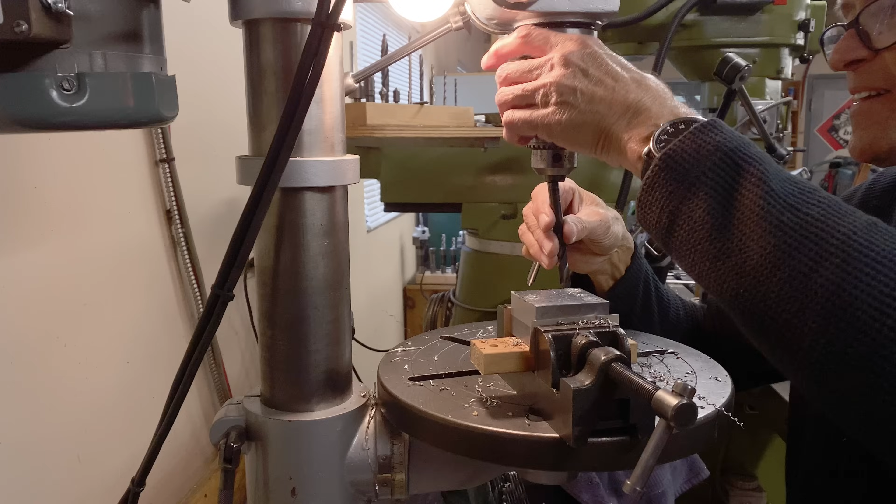But it's just one stem. How long can it take?

Hi, I'm Paul Brodie, back in the shop here. Feels like a good day, and we're gonna make a stem.

This is something that, well, I've made stems, but I've never made a mantis stem. That was Richard Cunningham, based down in LA. This was early 80s, I believe, and he didn't make a lot of these stems, so they're kind of hard to find, and I'm helping out here.

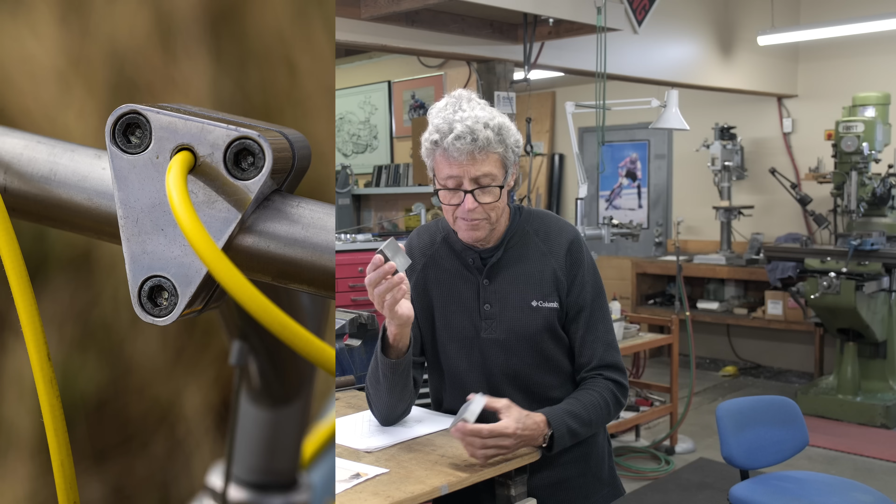What's unique about it is that it clamps the bar with a couple of plates. The rear one, which is welded onto the extension tube of the stem, is steel, and the front is aluminum because it saves weight. You can polish it up.

So that's going to be the first part. I worked on this last night, and I made up a drawing. It's kind of simple in a way, but at the same time it's a bit complex because you got to get the shape right.

I could see that Richard worked on this for quite a while to kind of maximize these two plates and the shape of them, because the extension tube has to go onto the back of the triangular plate. There's not a whole lot of room, and you don't want this to be big because it's steel - it's kind of heavy and clunky.

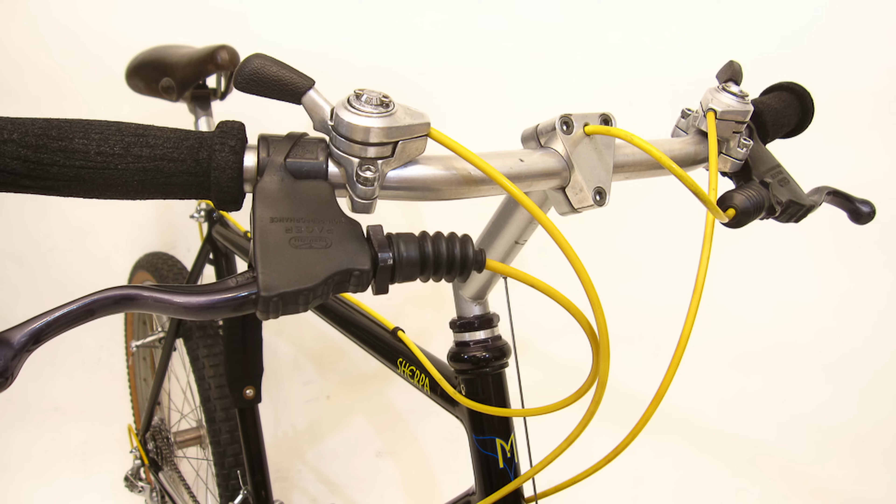And the stem also has a really high rise. It was one of the unique things about the stem - it was definitely high rise.

So first step is to machine these. These have been hacksawed, and I'm going to machine them because they get held. I'm going to put some cardboard in between, and that's when I bore the hole for the handlebar. It's an inch handlebar, and that's going to add the spacing, and these have to be narrowed down because I didn't have the exact perfect size, but it's going to work fine.

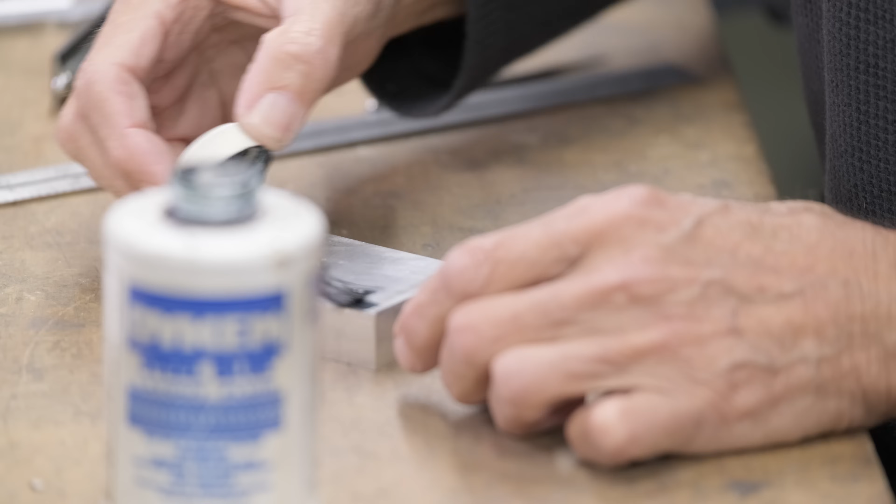I got some layout dye. I don't think the brand is important, just it's blue - it's called Steel Blue. You can also spray it on as well. Of course, that's ozone going up into the atmosphere.

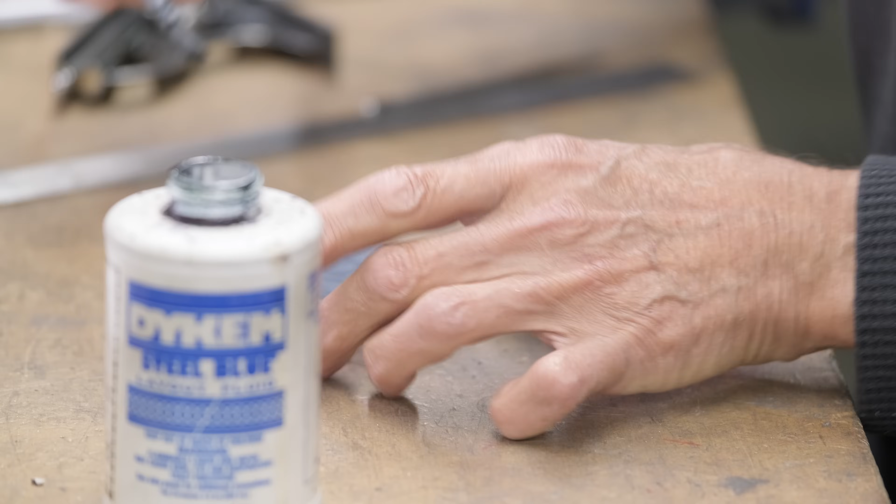And it's not super, super dark, but you can see a little bit. So we have to let that dry.

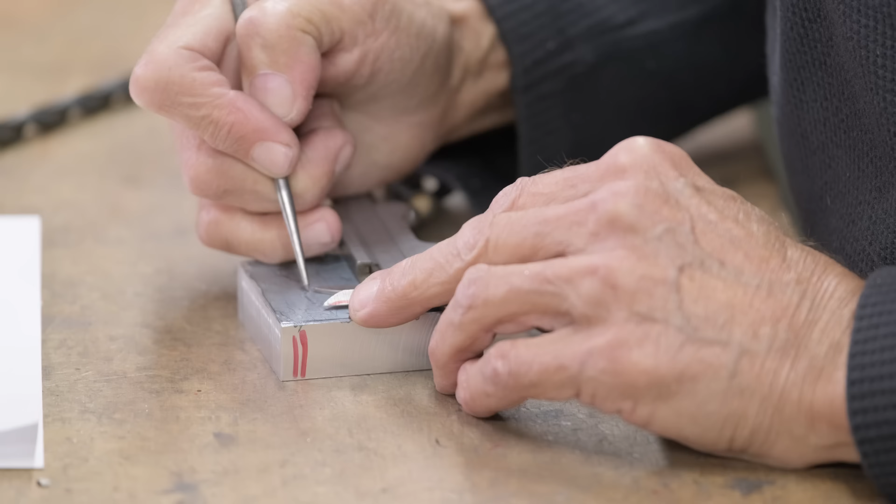That line there is the center line of the handlebar. So it's kind of a crucial line.

So this is a larger space here in between the center line and the bottom than on the top. It's not symmetrical on both sides. That's how it got laid out all those years ago. That's going to be the middle, right up the middle.

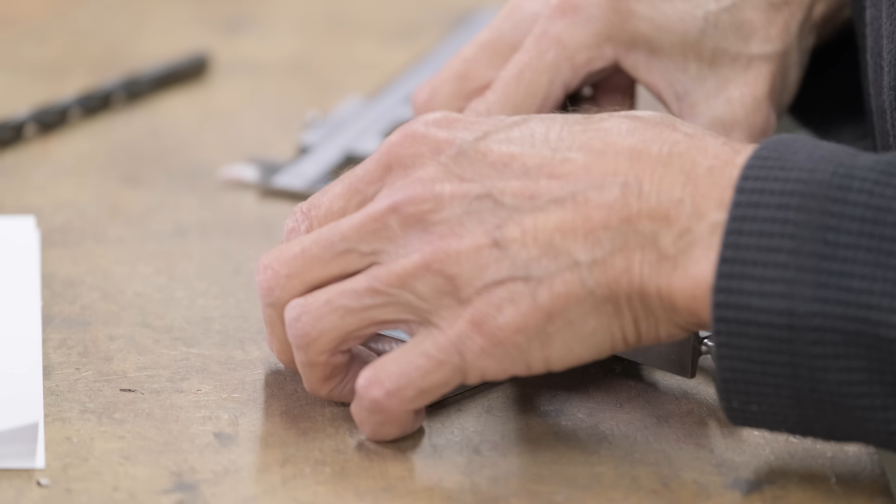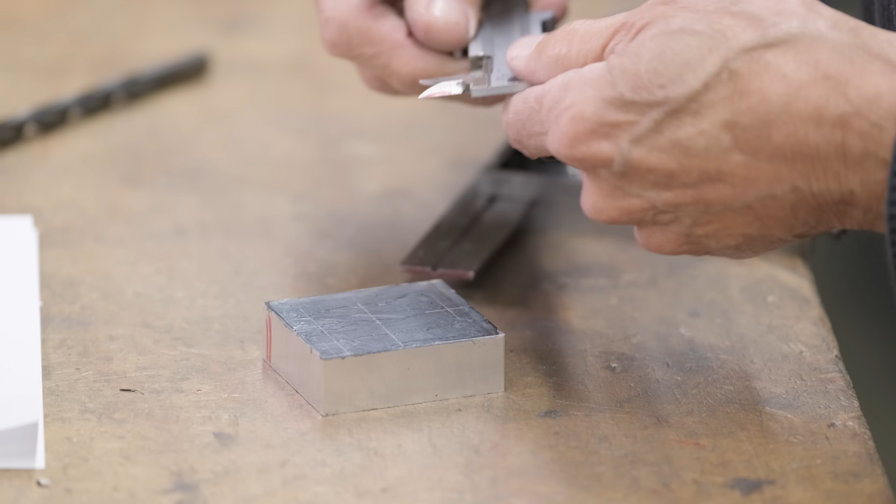And this is the hole for the cable guide, and it gets offset off the center line of the bolts by 100 thou. That's what I came up with. We also need an internal cable routing in here. I'm not quite sure how that all fits together in 100 thou.

After this, we'll go over to the surface table and we'll punch it, and then we'll drill holes. We need 4 holes.

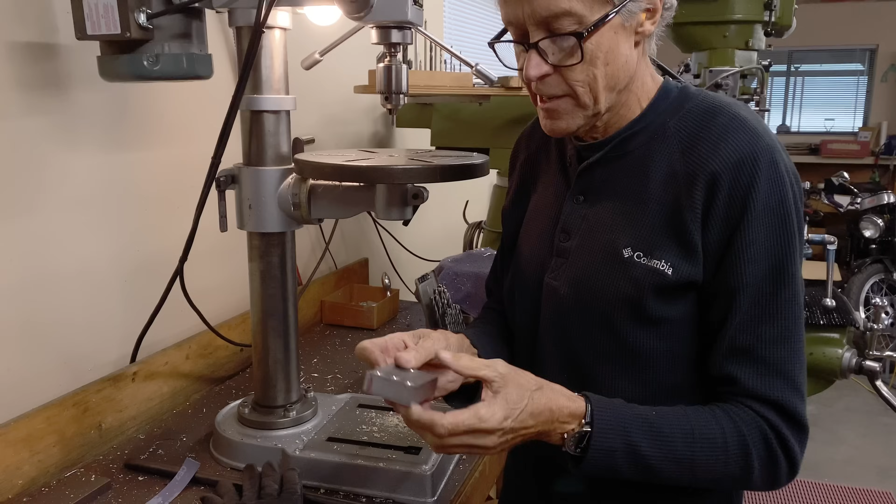I'm going to grab the extra piece, which goes on the back. I'm going to put some cardboard on the sides because the cardboard helps to hold the two pieces, even though they're the same size, because the vise always wants to do this. So a piece of cardboard is very, very handy, and I'll put some wood underneath so then I can drill right through.

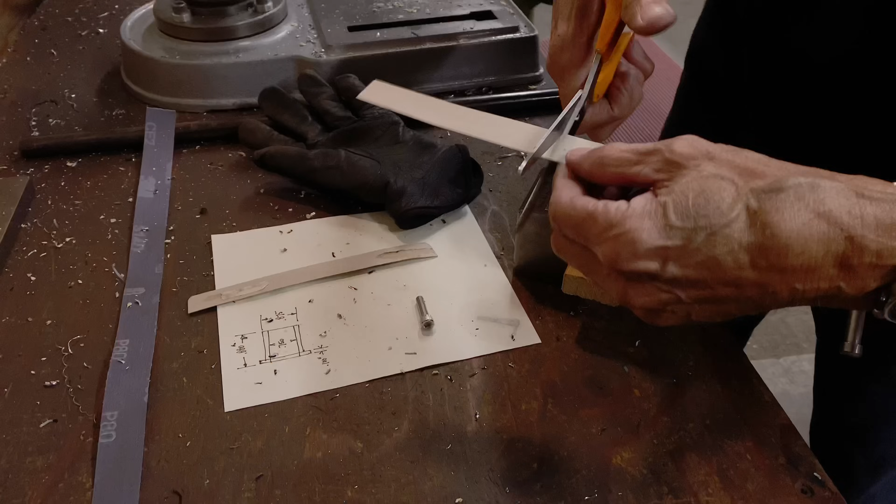And I'll just put that on either side and that'll grab, and then I can drill all I want.

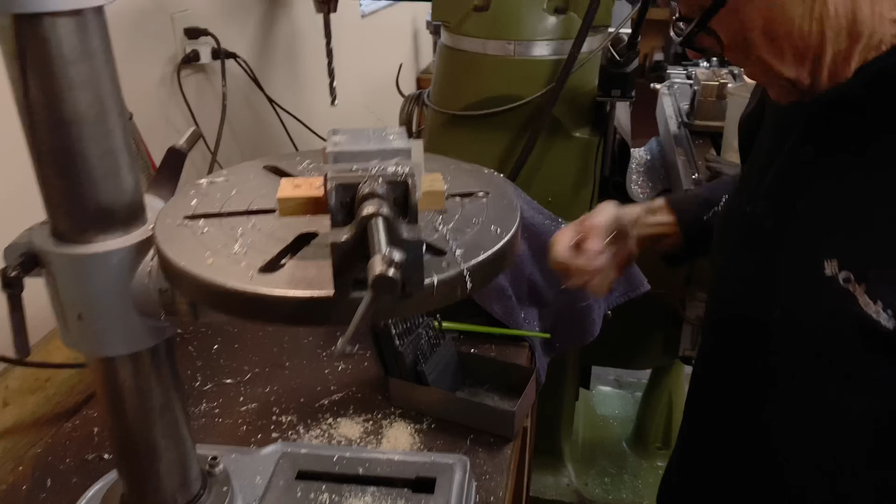I'm going to counter bore now for the Allen screw. Then this is kind of done here on the top. And that looks good - it's just below the surface by a smidge.

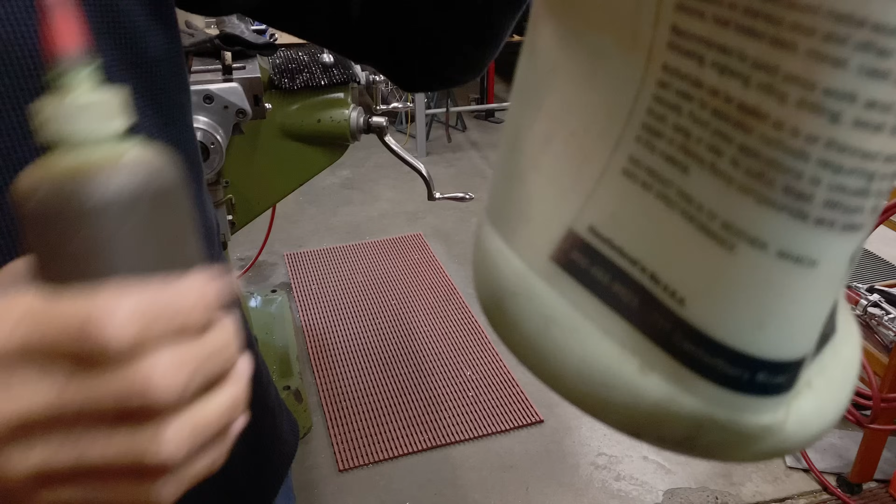Grab my tap and I'll start the threading in the drill press. This is anchor lube, and I know the bottle looks really old, and the reason is because I get it out of here and I put the date on there. This is 04 - that's how long I've had this big bottle, and it's still about half full.

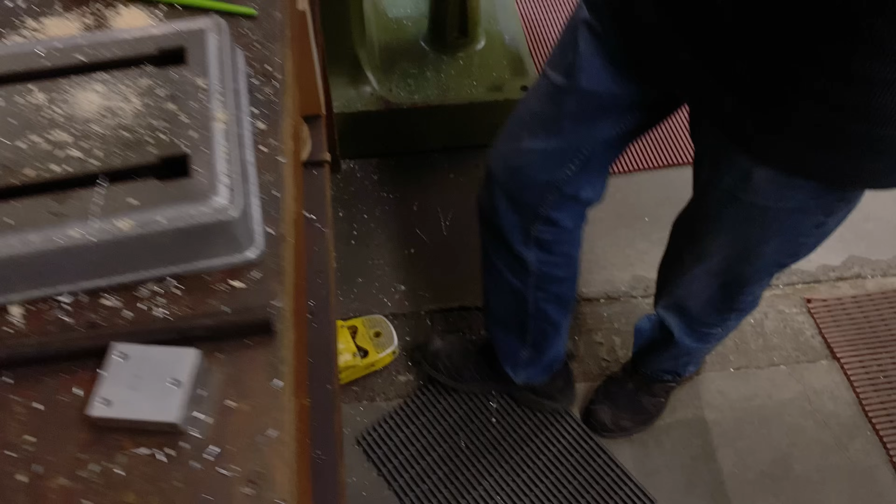Anchor lube. I'm not going all the way through here. I start it and then I have a foot switch - see the foot switch? And I switch it off as soon as it starts because I don't want to break the tap.

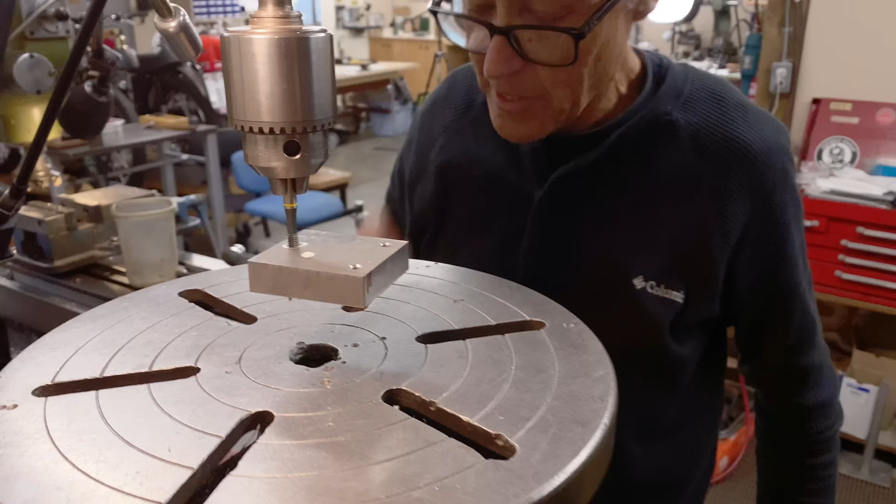Anchor lube. And that starts the tap perpendicular, which is a good thing. Now I go over to the vise and I just finish it off with the hand tap. See all the chips on the bottom? Can you see that? That's what a spiral point tap does.

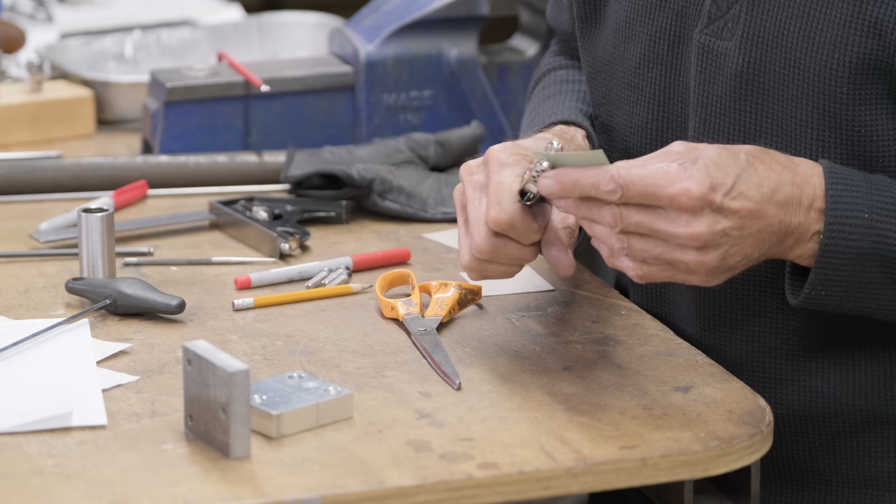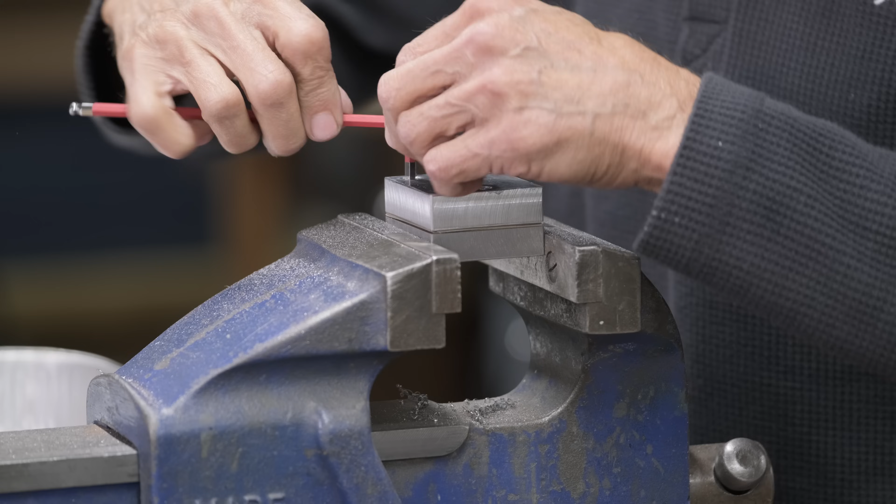It's like a gasket, but it's really just a spacer. I put the cardboard in there because there has to be spacings because these hold the handlebar. So if you just make an exact hole, there's no squeeze effect on the bar. That's why the cardboard.

I got a drill here, it's about a 1/4 inch. You might wonder because this is aluminum - this is cold rolled steel. So the drill is going to want to go more into the aluminum because it's softer than the steel. So I think it'll be okay, but I just have to be aware of that.

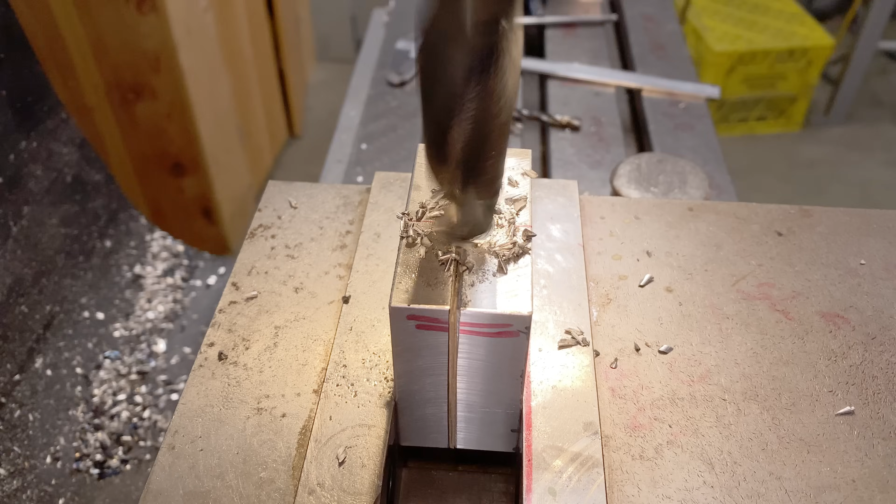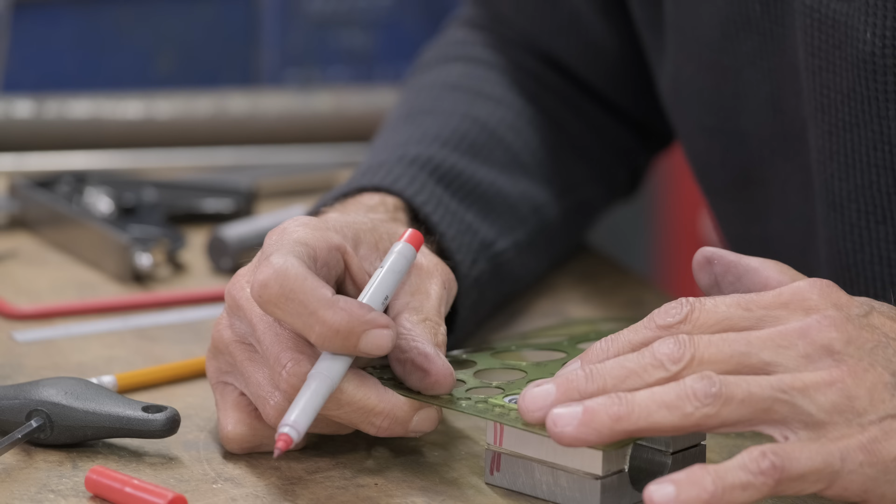I've got my plastic to make circles, so I have to outline where the triangle is and the radius in the corners.

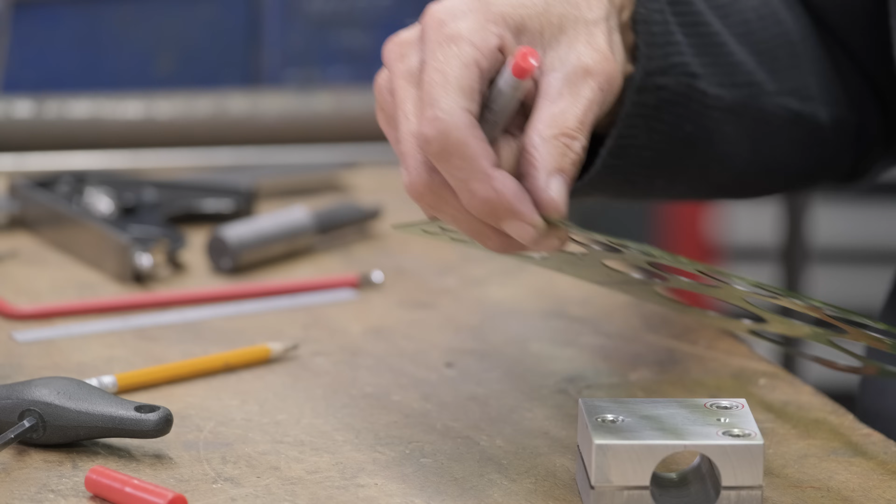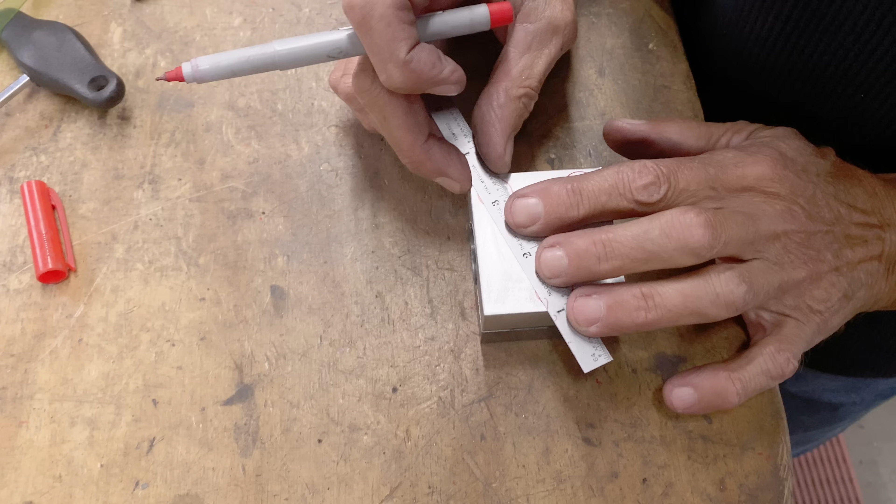And then we'll go to the bandsaw and we'll cut this out. Then it goes back on the mill. It'll get nicely faced, because this is what everybody looks at. They're going to look at this piece here, so it needs to be nicely done. So there's a radius, and then if I join up the lines, I'm drawing a line which is tangent. And then you get to see the shape.

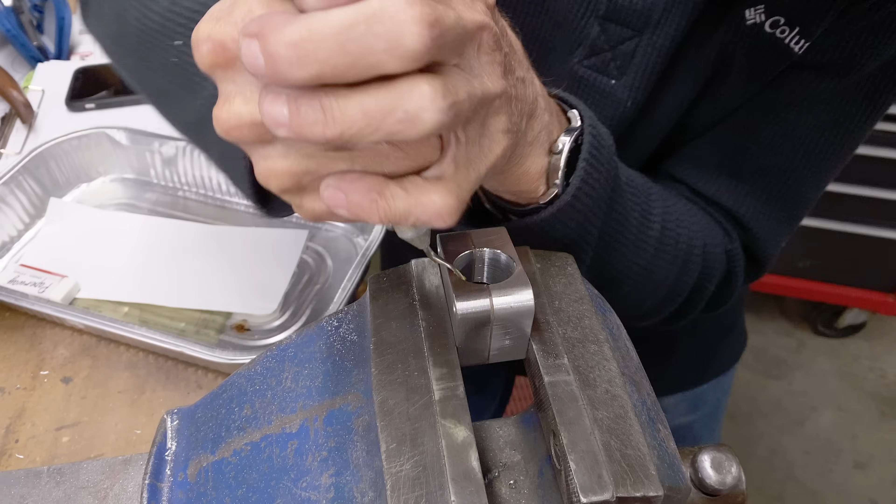Oh, we got a burr right there.

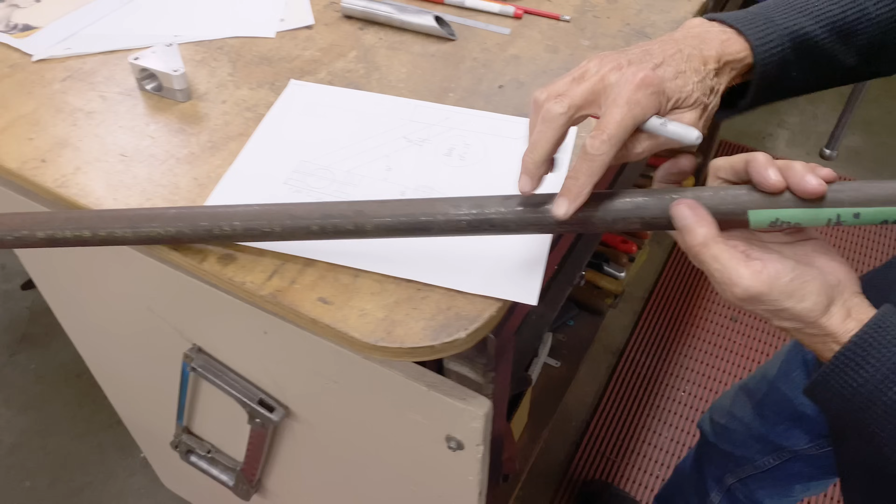Okay, what I want to do now is cut the extension tube, so we'll get a red Sharpie. There it is. It's 4130, a little bit rusty, surface rust. 4130, inch and an eighth, 049. You can use 035, but a little bit of a safety factor going on here.

So I need to cut that angle there. So we're going to put this like that. That's about how long that's going to be. And that's the top. And that's going to be my hacksaw line, and then we'll belt sand it.

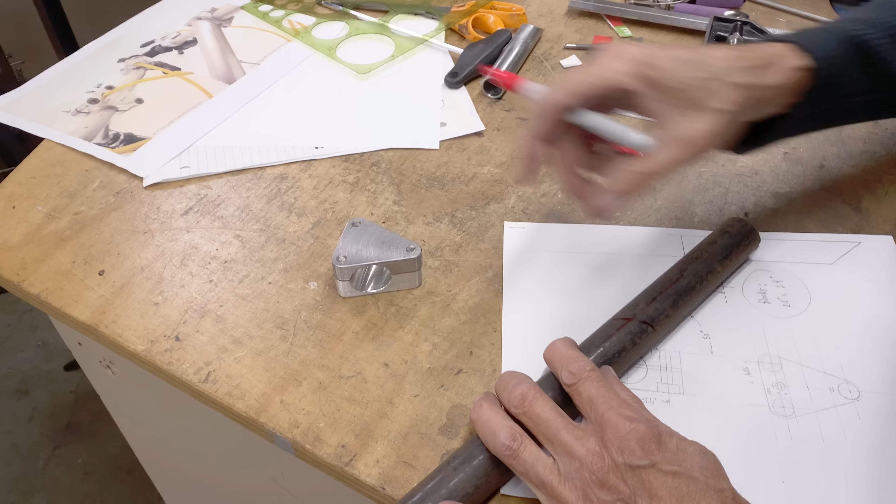And then I want to see how this fits onto that, because I discovered last night that it's a pretty close fit. If you don't get these sizes right, it could be too small. So I spent quite a while working on the ratios of what it is.

Every time I pick up a hacksaw, I always think of Allen Millyard. I don't know why that would be.

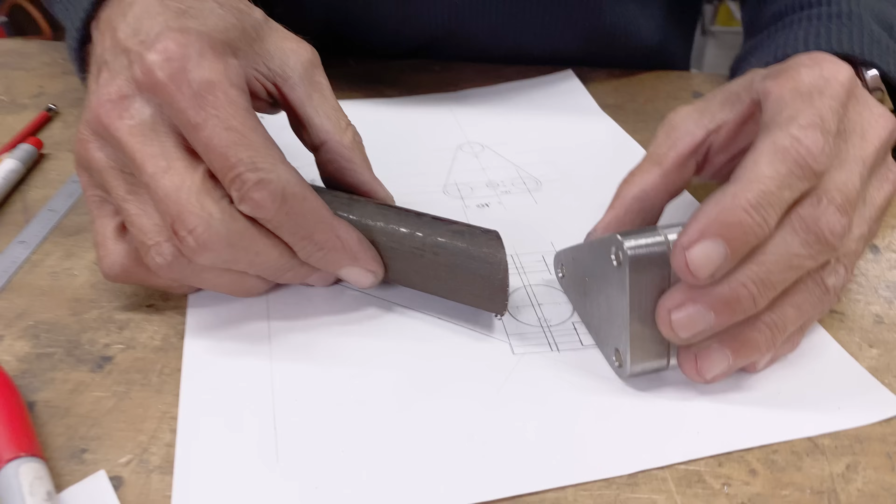How's my angle? Not bad, not bad for a hand hacksaw.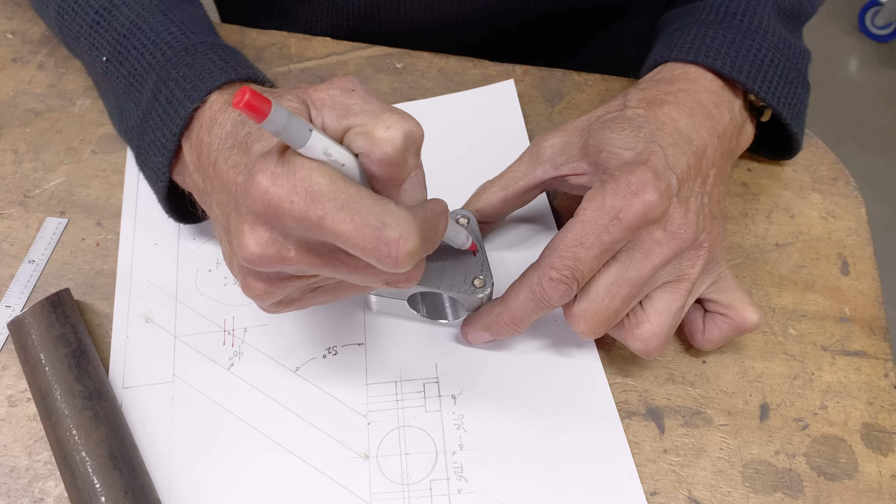So how this works, there's a space there, and I think it's 200 thou, something like that. So that's about that, so that gives a little bit of room for the TIG welding. And then you also need room on the sides. So let's see what we got here. There we go. That looks good, that works out quite nicely.

When I build a regular stem, I've got the handlebar clamp tube. I mitered this and I weld it on. And then I set that up in the mill vise, and then that's when I mitered the other end. That's for the quill tube.

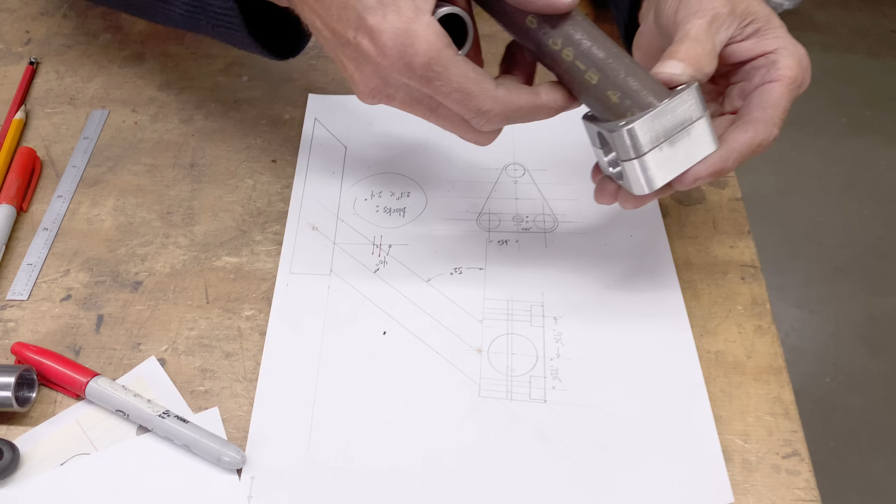With this, it's different. So what I need to do, I need to know that this tube, this extension tube, is not at an angle either way. So how do you do that on something like this? Because there's no two flat sides.

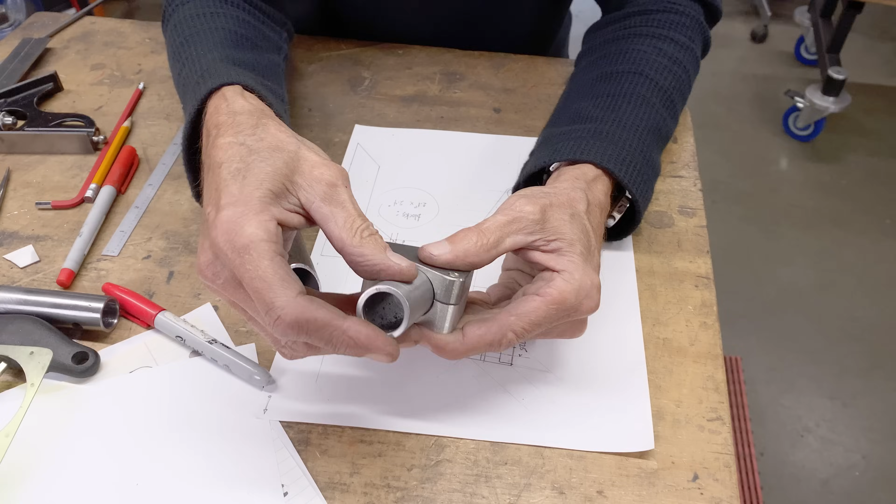That's why I have this particular tube. It's an inch, same size as the handlebars. It goes in there into that bore, and then I can clamp on either side and come off that and know that this is in the middle. That's why I have this, and that's why I'm doing the sequence like I'm doing. I don't start down here because that would be almost impossible to get this lined up and straight. So there's a little bit of a method to my madness.

I'm drilling holes for the cable. The cable is going to go through here. It's going to stop at the red line, and that's the outer cable, and the inner cable goes through. Then I drill a 3/16 hole. That's where the cable routing goes inside the stem.

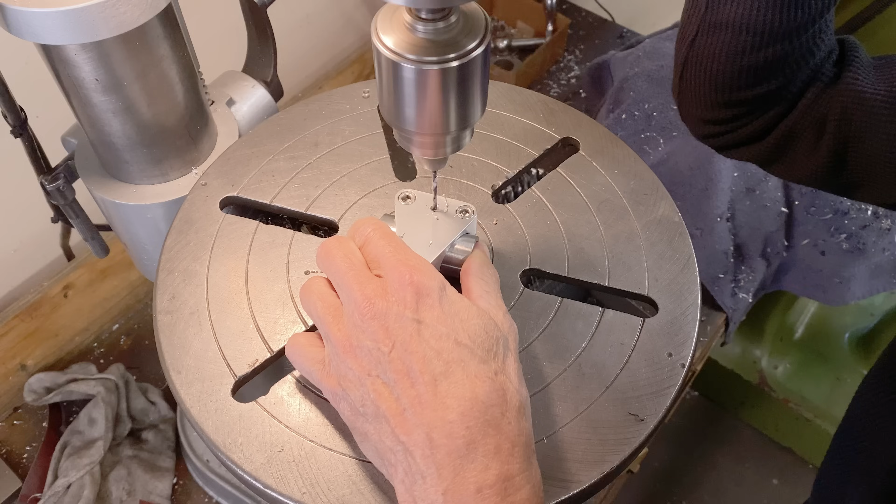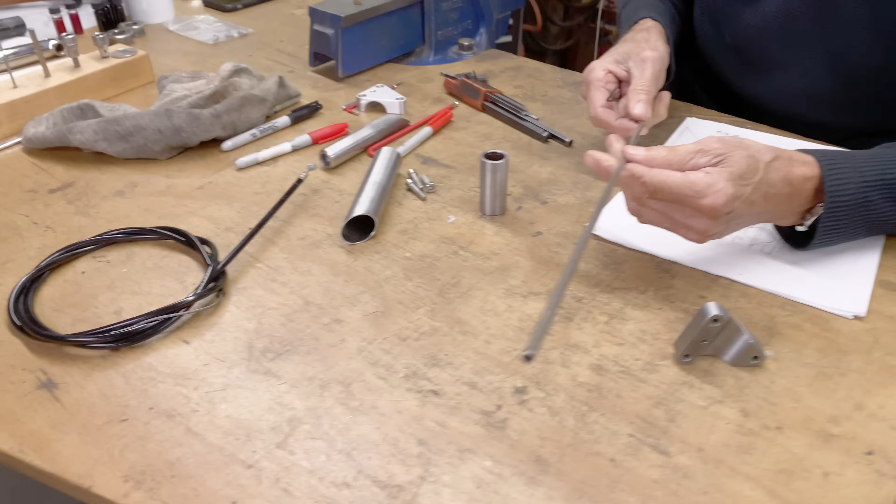I want to show you what's going on here. Here's my drawing, here's the plate. There's the hole, so the hole is right there. So this 3/16, it's a cable guide tube. It has to bend here, okay?

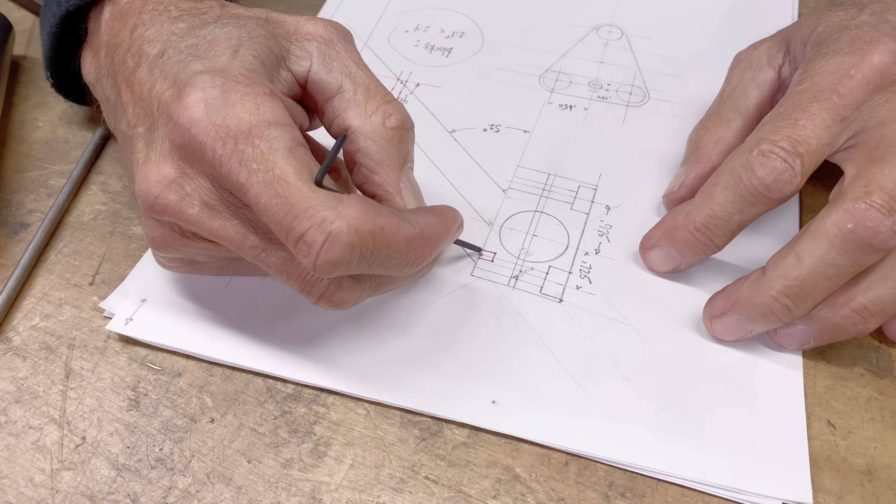There's got to be a little bend so that it has to come inside of the tube. There's the tube, and then there's going to be a bend down here. So it's going to have a small bend here and then come down here. And there has to be a space here because there's going to be a hole in the bottom of the tube here.

And when this gets welded on, this has to be levered down a little bit, and this tube has to fit through the hole here. I don't know how else to do this. You know, there's been a few nights where I've been lying in bed not sleeping because my mind is just going round about this, thinking how do I do that, how do I make it work. I think this is the best way because I don't see any other way that makes sense to me.

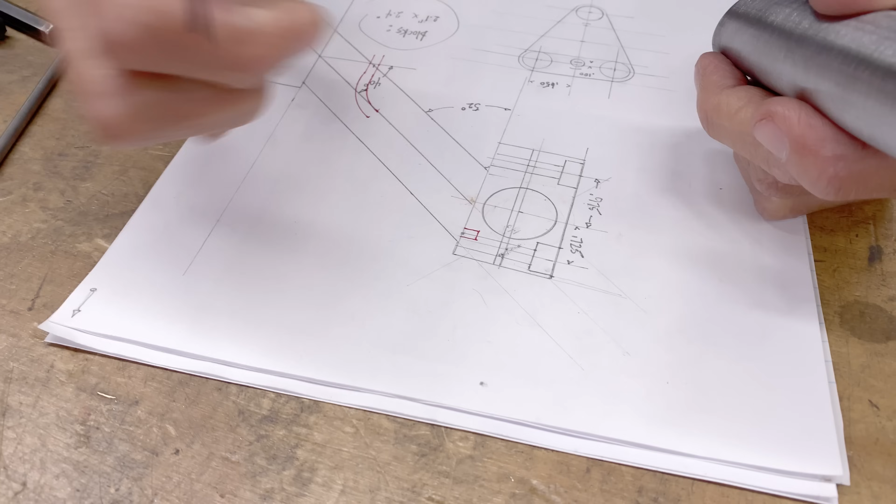So that's the first thing we're going to do, is bend this, and then I'll install the tube. I'll make this shorter, it's going to go into here. This is the back, and then this tube, the extension tube, has to go on. See that red line there? That's about how high up to go. So everything is really close here.

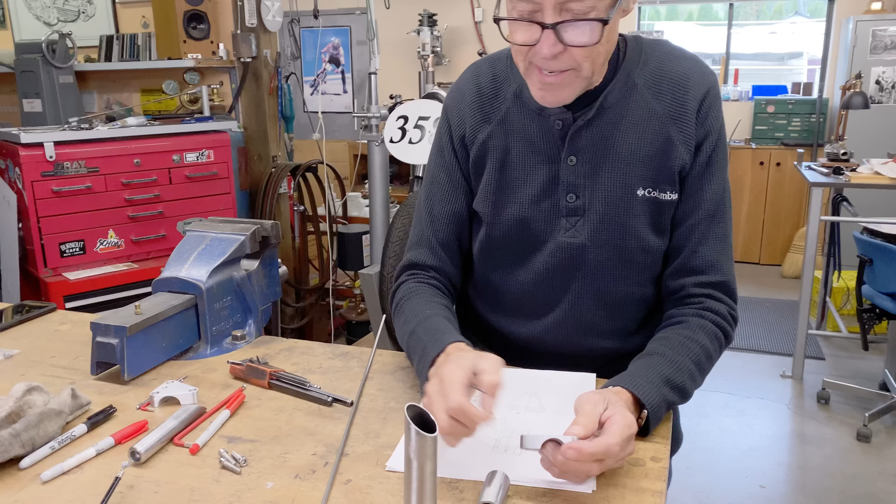It's definitely not an easy stem to make, at least not the first time. Okay, that's the first step, is to put a little bend in there. So it looks like I have to make a saw cut at about the line. That's about, because it needs to go into here.

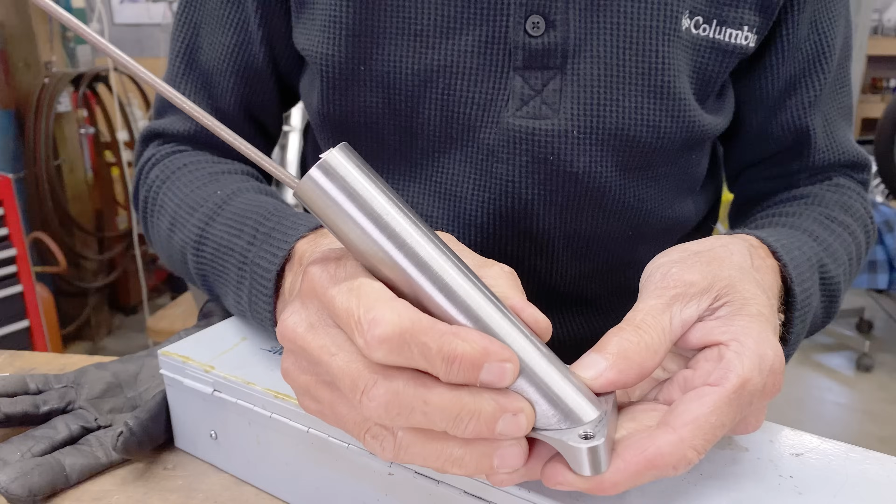Okay, what's going on here is that there's an angle on the extension tube, and so it needs to go down as far as it can. When I was looking at the photographs, it seemed to me that if I drew a line right there, that's how far it needs to come down, or it wants to come down.

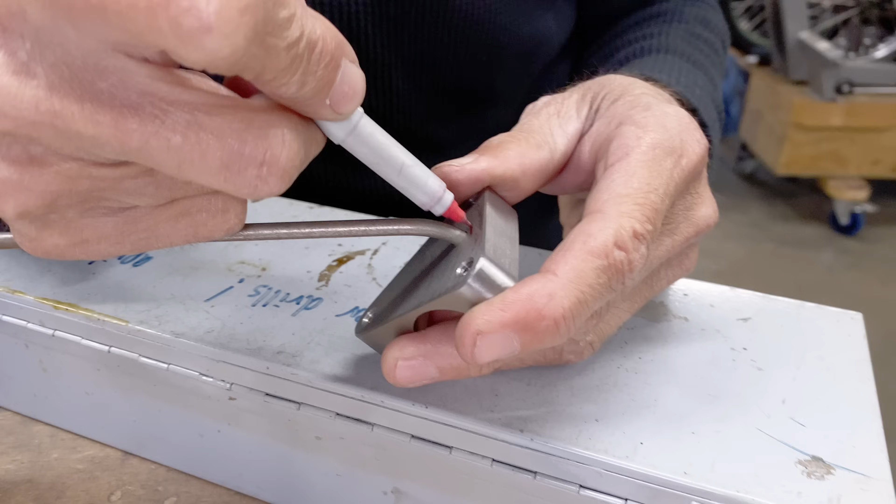But can you see that it wants to be higher? That's quite a bit lower there. So how do I fix that? I guess I fix that by making this hole deeper, and then I put a countersink on there so that the tube, because it's got a radius on it, can fit in more.

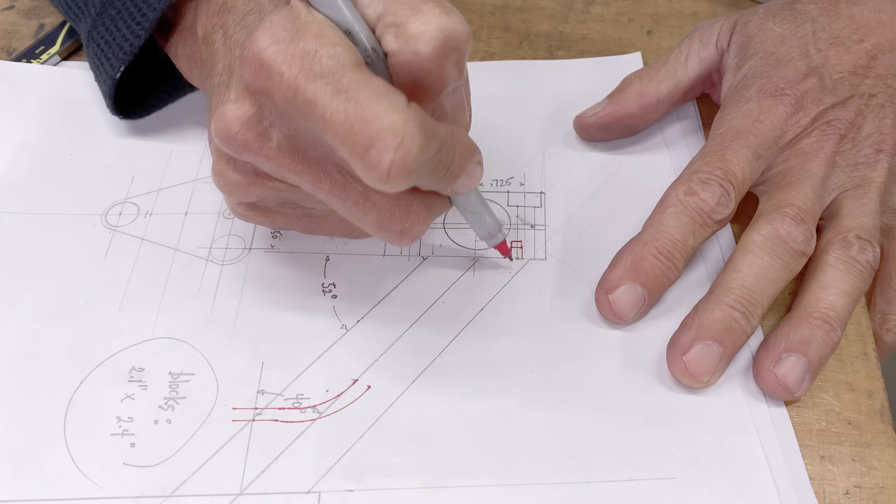Does that make sense? I'm thinking that what I need to do is make this hole go in more, like that, and then have a radius here. I can use a little tool to make the radius so that there's more space between here and here. So let's try that. It's a little bit of fiddling around, but I'm trying to make this as nicely as I can, being fussy.

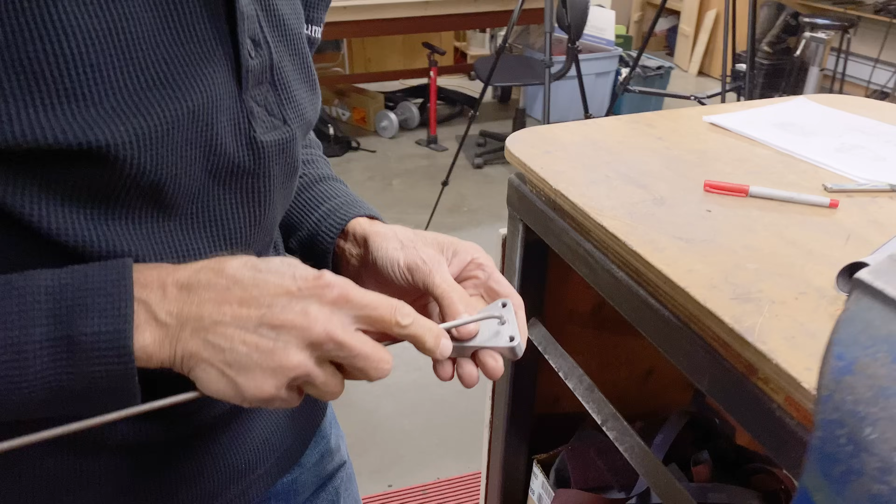Oh, okay. Well, that certainly went down. How about that? Look at that. It goes right to the mark. Okay, that's very good.

That's success. Okay, what we need to do now, I'm going to make a mark where this is, where the top is, and then we go to the drawing. So handy having a drawing. That mark is the end of the plate, so that goes like that.

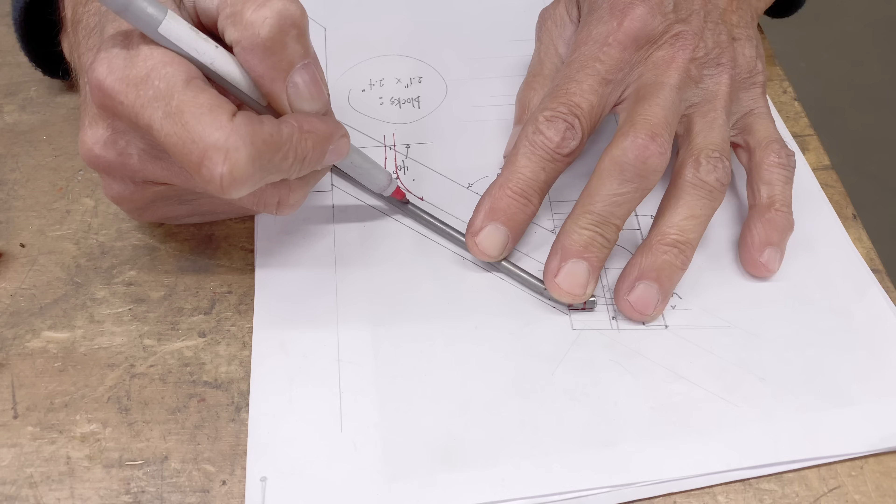I can probably start the bend, I'm thinking right about there, because it's going to bend around and then come down there. Maybe the bend starts a little bit up there. Somewhere in there, that's where the bend is going to be. So here we go.

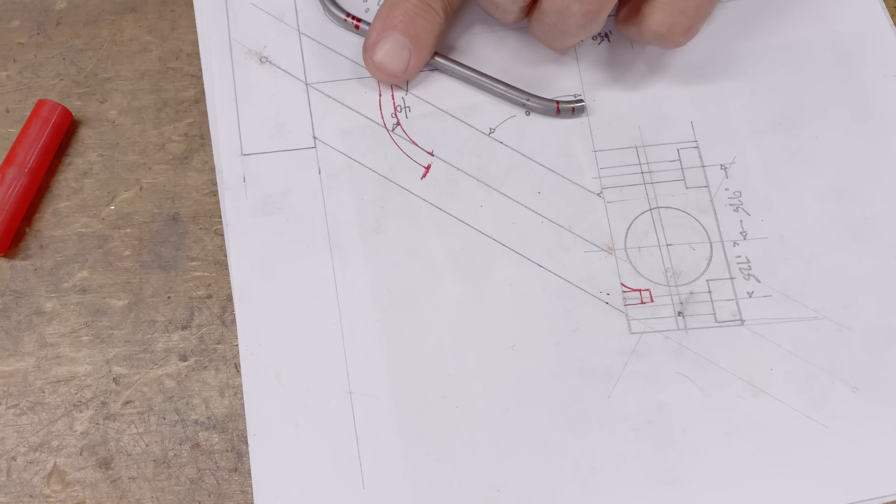And I won't go too far because I need a little bit more. Need to check. And I need to take some bend out. This needs to be in parallel with the quill tube. So I need to take out some bend.

And maybe I need to start it a little bit higher, because when I take out bend, it's going to move it back to here. And the spacing between here, where the cable comes out and the stem, that's kind of critical, because you want the cable to be in line with everything as it goes down to the brakes.

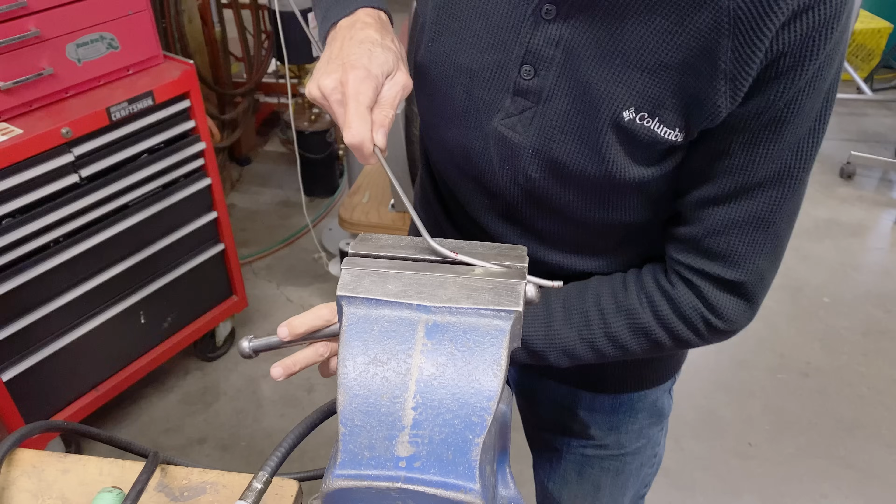I'm going to take out a little bit of bend, and then I'm going to add a little bit of bend. So there we go. I've taken that out.

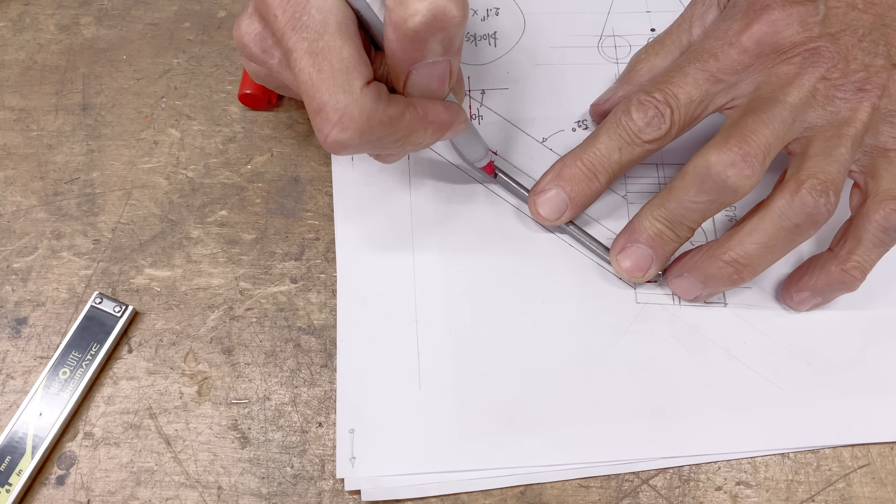So we're obviously back too far. So what that means is that we need to start the bend probably up there somewhere. So I'm adding bend up this way. There we go.

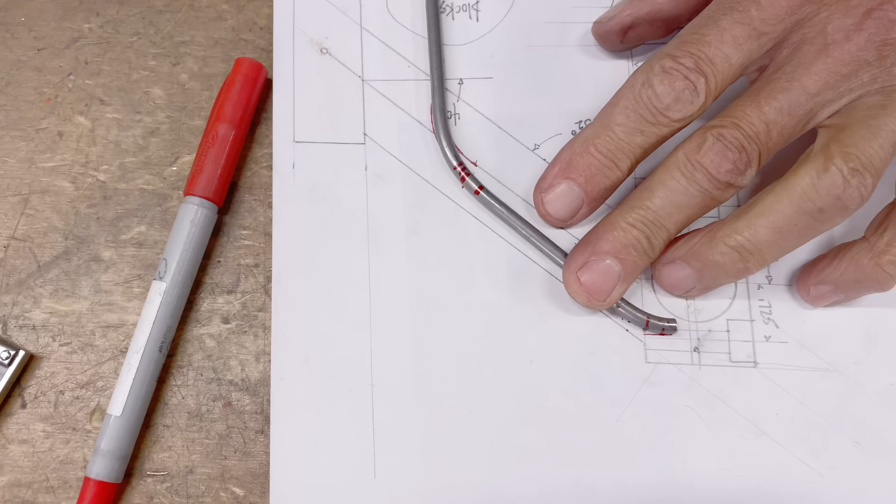So I've added bend there, but I need to take off quite a bit of bend here. Okay, that's looking pretty good. So I think I'm going to make a cut right there. Looks pretty good.

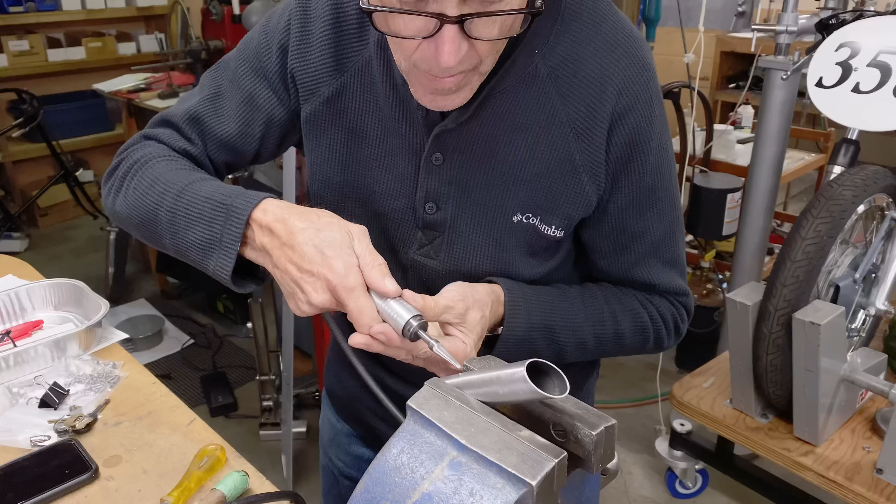Oh, hey. Might have had a smile on my face there, I don't know.

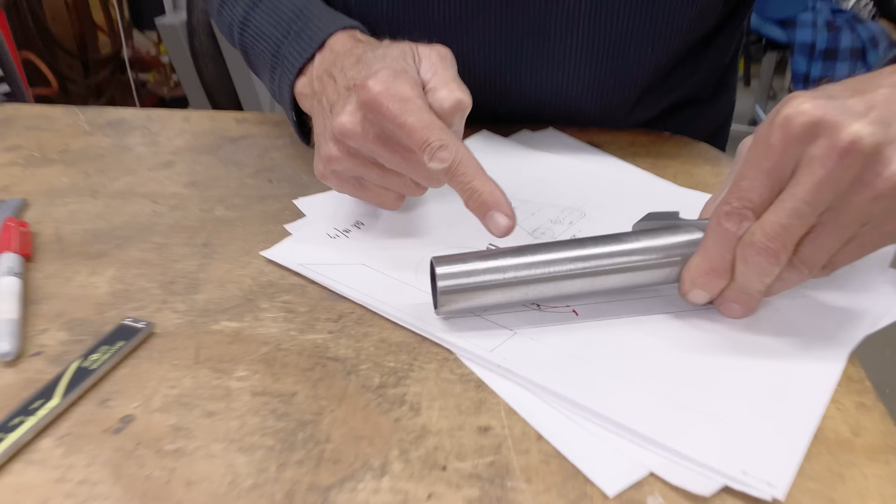Finally. So, that goes in. And we're on the line. I like that. And it comes out. Woohoo. And look, it's at the right angle there. See the angle? It's at the right angle. It's good.

I think that's going to work. So next step is to braze this in. This is going to take quite a bit of heat. We're getting close now. This is good. This has been a lot of work, but I've enjoyed it.

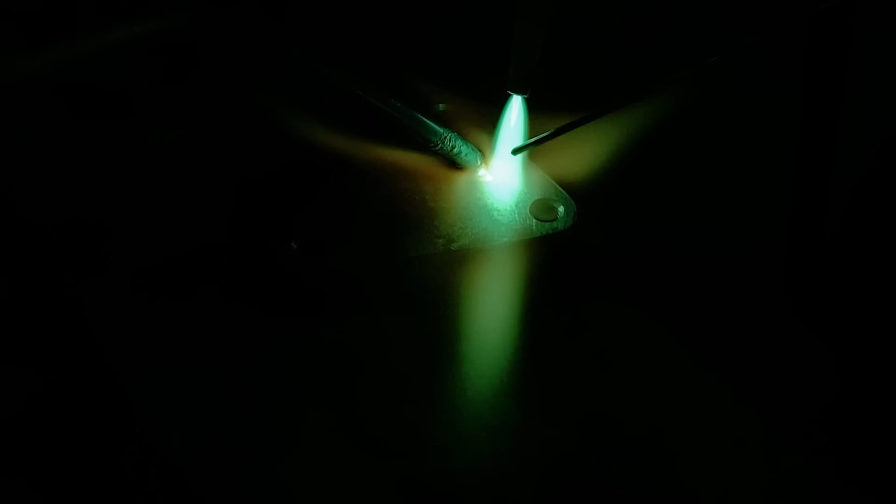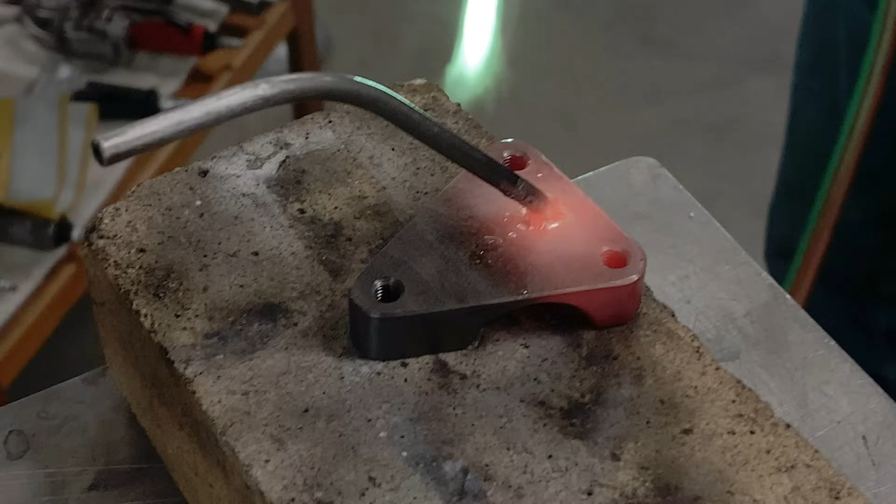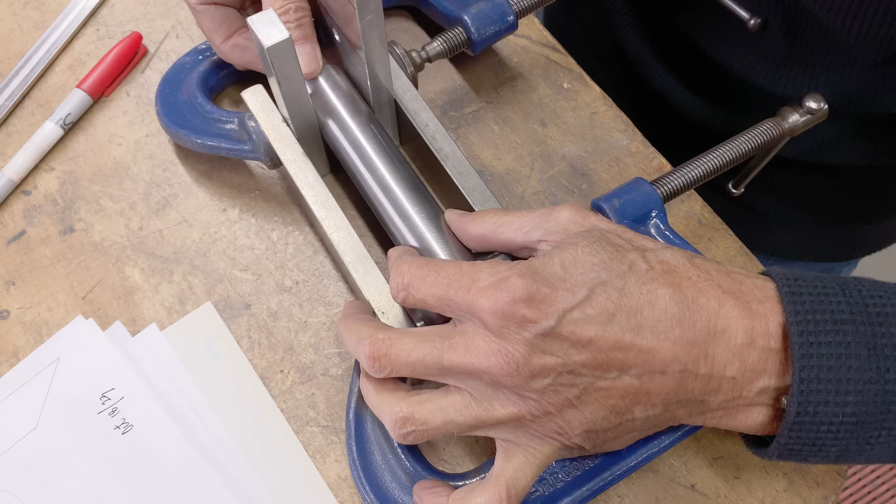That's good. Okay. I have to make sure that this angle of the tube fits flat against the backing plate there. And that seems to be good.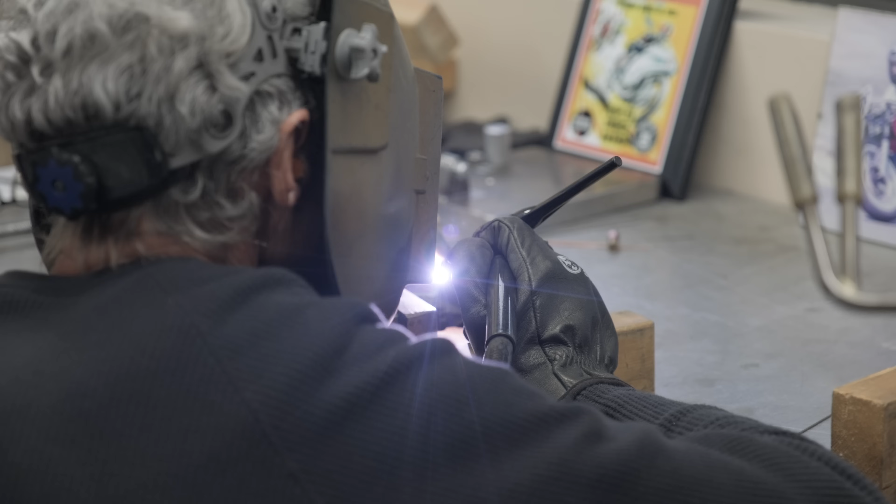I'm on the arbor press here, and I've got the stem all set up. On the tube here, I've got a feeler gauge on the bottom here, because that's what sets the angle, so that it's perpendicular. I'm pressing down.

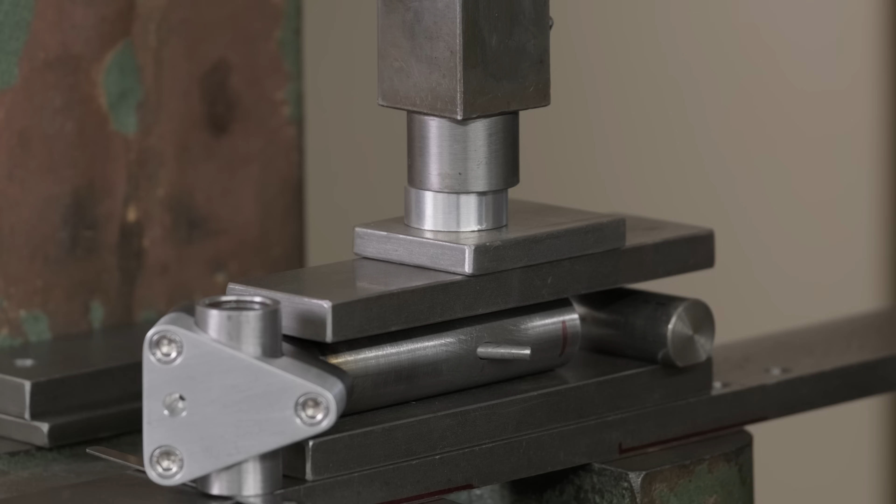So I have a block here. This is my stop, because that's the right amount of squish for the quill. So we'll see what happens here. There we go.

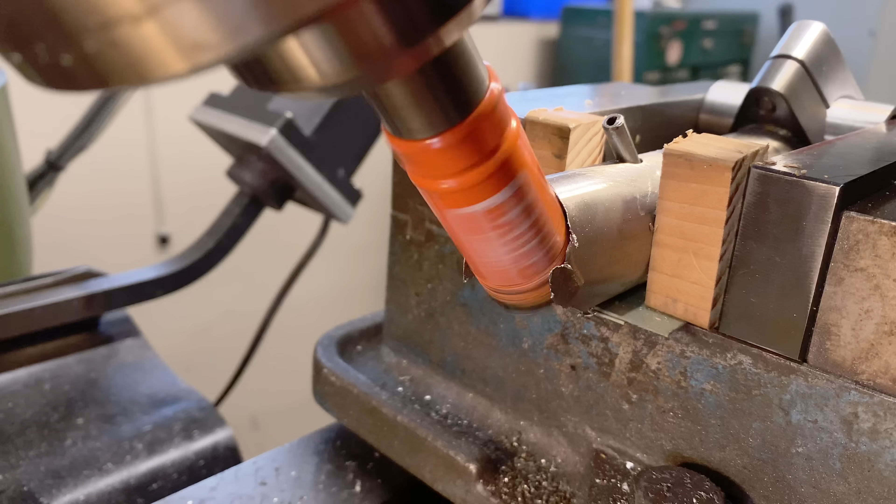Nice and easy. I got the RPM at about 300. I got a little bit of pressure on the hole, so I don't want to put a lot of pressure on, it could grab. So it's cutting. It's cutting a bit slow, but that's okay. We're through.

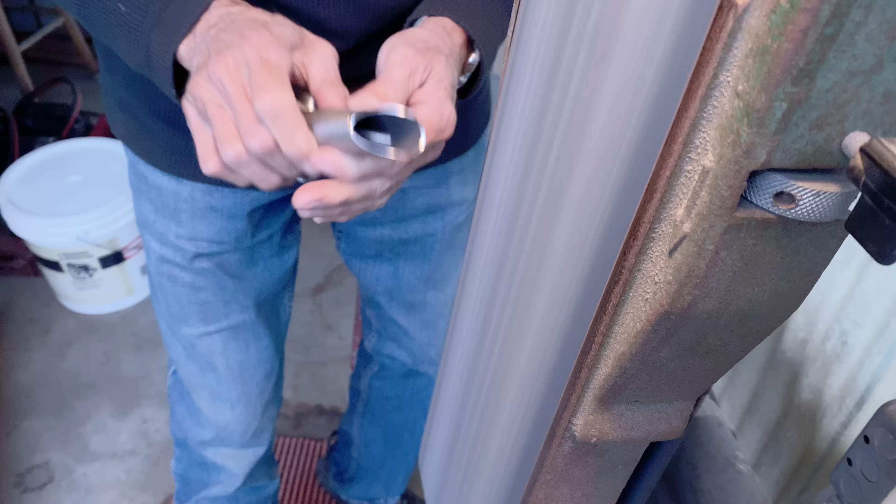So that's what it looks like. On the quill, this part of the quill has no cap. This is integral. I took a piece of steel and I machined it so it fits inside, and that's where the Allen screw goes inside. It becomes one piece with no stem cap that goes on top.

That's what the stem cap looks like. I don't have the right size, but normally they have a cap on the top. This one doesn't.

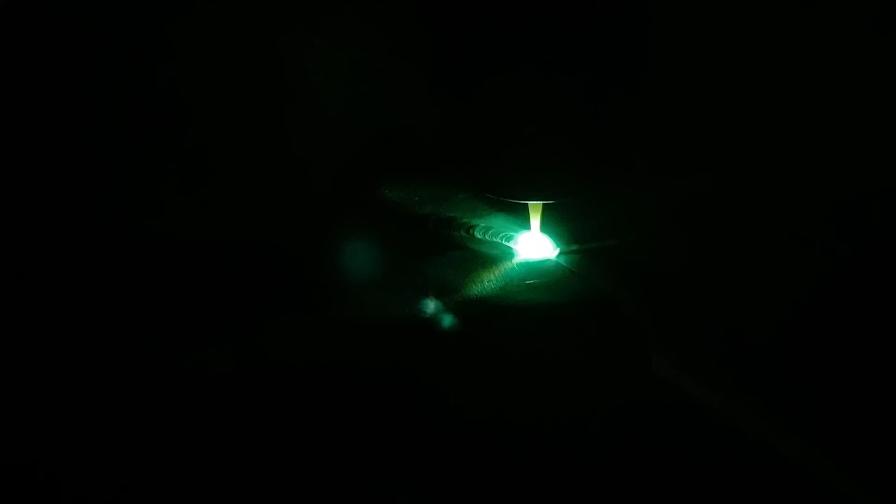All right. What's left is to nickel silver this little cable routing there, and then to cut it off. We're very close now. I like that.

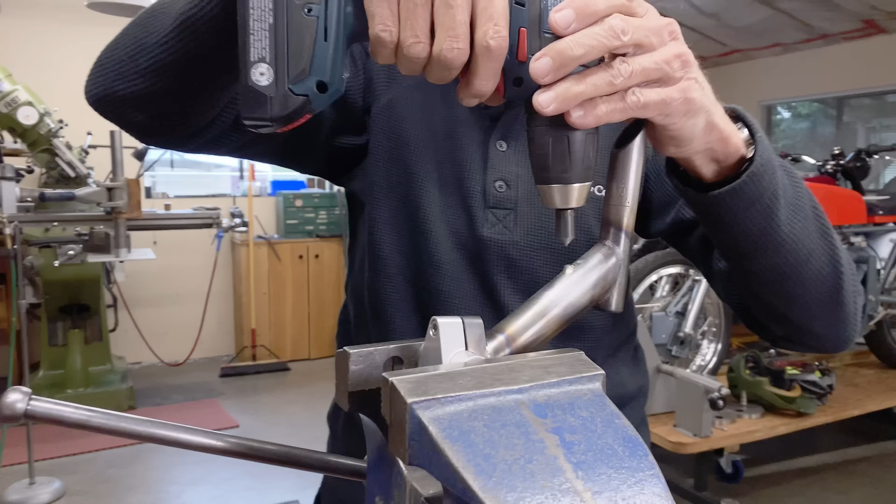And that is our video. We hope that you have enjoyed watching this. It's the making of a Mantis stem.